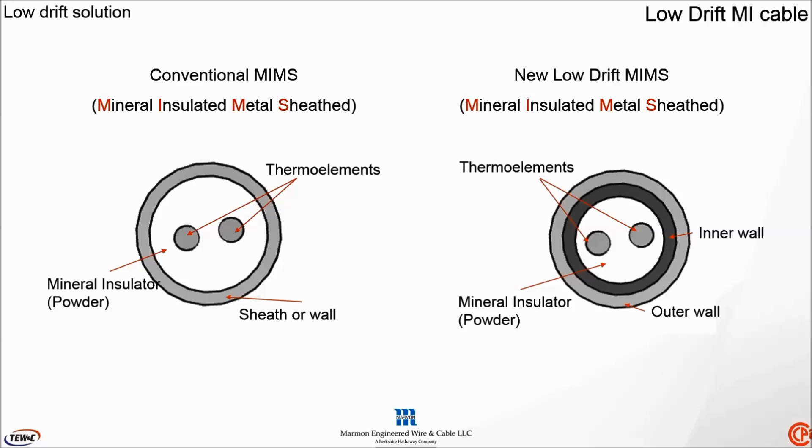What I'd like to do now is show you a set of graphics or animation that shows the concept of what the researchers found: under conventional conditions at high temperature, contamination was caused on the conductors from migration from the outer sheathing itself. This caused a change in the metallurgy, which caused a change in EMF output, which was the source of the drift. With this new low drift design put forward by Cambridge University researchers, this inner wall would stop or reduce the metallurgical contamination of the conductors, and therefore stop or reduce the drift.

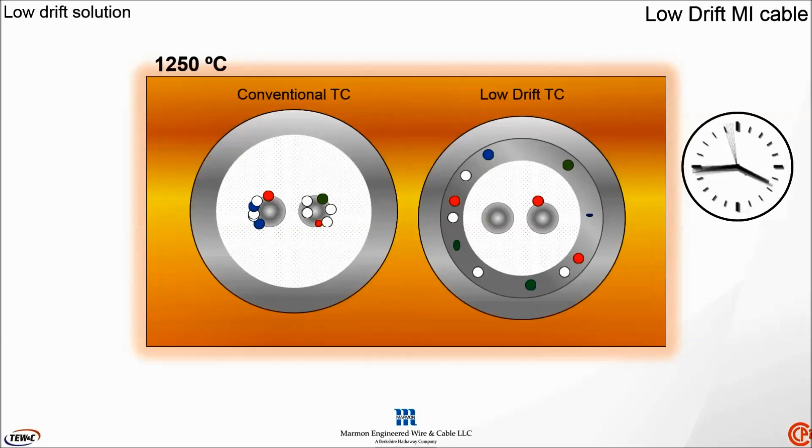So what I'd like to do now is show you a series of test data conducted on this new low drift cable in comparison with the conventional cables that are used in industry today. This first test was conducted at the CCPI Europe laboratories, and it was conducted on 3mm diameter Inconel sheathed Type K conventional MIs against the new low drift dual wall counterpart.

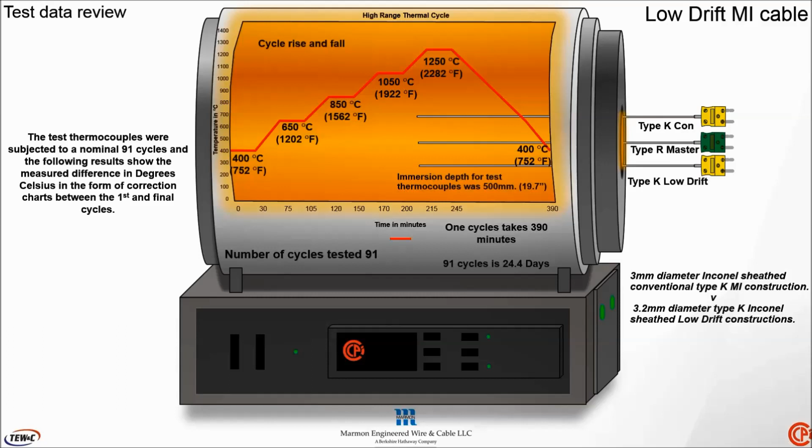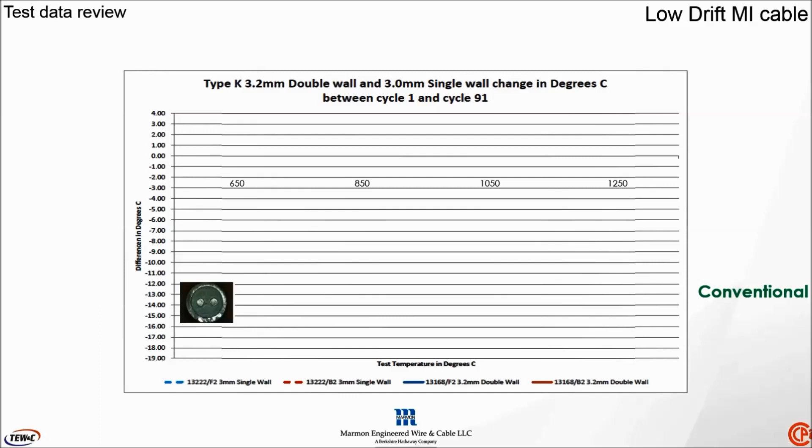The results are going to show us in chart form the change in EMF output in degrees C over those 91 cycles for the respective test thermocouples. Down the y-axis is the change in EMF output over the 91 cycles in degrees C, across the x-axis the temperature points of calibration during the test. So first of all, let's look at the data from the conventional thermocouples. Two units were tested. The first one in blue shows the change over the 91 cycles was between 12 and 11 degrees C. The second one in red was slightly larger, between 15 and 17 degrees C over the 91 cycles.

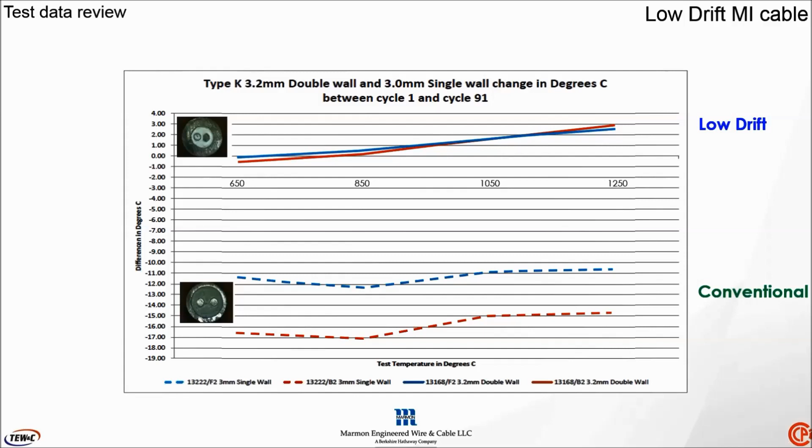Now in comparison, under the exact same conditions, let's have a look at the performance of the new low drift design. Again, two thermocouples were tested. Both thermocouples over the complete temperature range of testing over the 91 cycles showed less than 3 degrees C movement. As predicted by the researchers at Cambridge, somewhere between a 73 and an 83% reduction in drift was observed when the new low drift thermocouple designs were compared against the conventional designs being used in industry today.

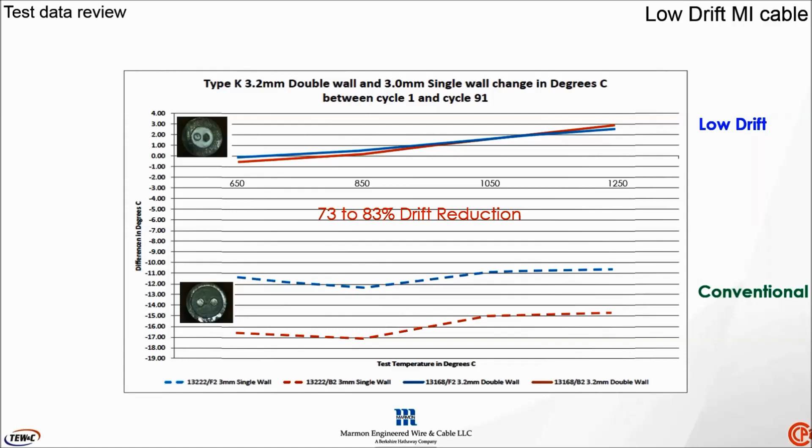This next sequence of testing was conducted at an extremely high temperature of 1320 degrees C, above 2400 Fahrenheit, a temperature we would not normally recommend Type K or Type N thermocouples to be used at. The test was conducted for some 52 hours, or 2 days of operation, and the thermocouples tested were the same as the previous set, i.e. 3mm diameter Inconel sheathed conventional against their 1/8 diameter dual wall low drift counterpart.

The results, again in chart form, show us the changes in correction value in degrees C at the test temperature of 1320 for the respective test thermocouples. In this instance, the chart shows the change in correction in degrees C down your y-axis, and the time in hours across your x-axis.

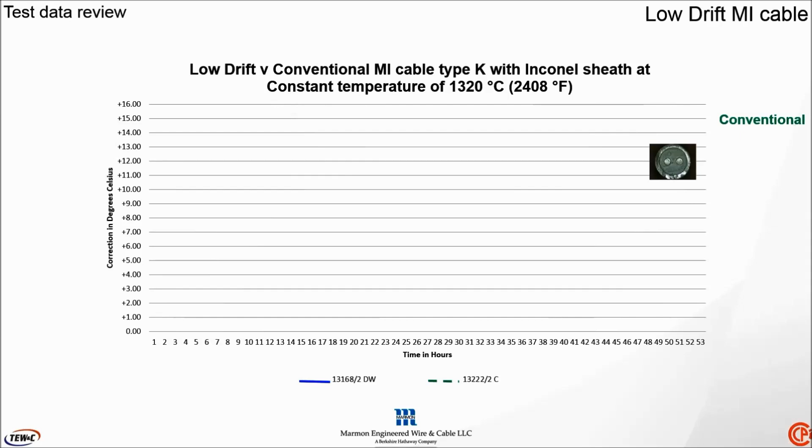So first of all, let's look at the performance of the conventional thermocouple. As we would have expected, a continuous drift was observed, an increase in the correction value, a lowering of the EMF output value, starting at some 3.5 degrees, moving to some nominal 15 degrees, showing a nominal 12 degrees C shift over the 52 hours of operation. Actually quite a good performance for a 3mm diameter Type K thermocouple.

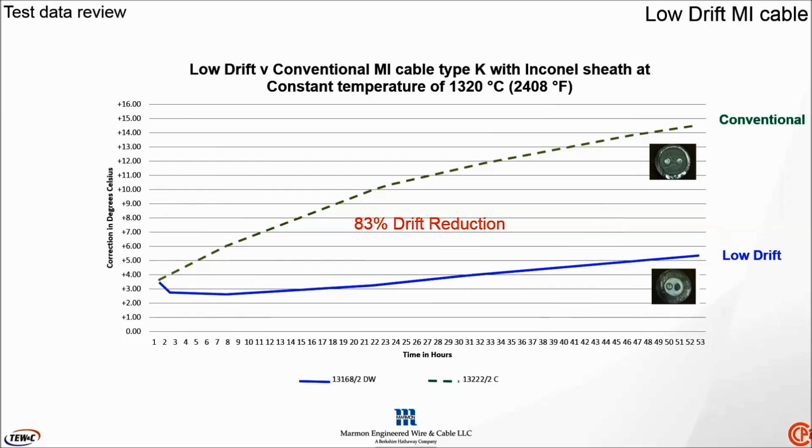Now let's look at the performance of the new low drift design under the same conditions. Well, you can observe a significant difference. Again, starting off at some 3.5 degrees, but finishing at less than 5.5 degrees C correction value, less than 2 degrees C nominal movement, or, as predicted by the team of researchers at Cambridge, an 83% reduction in drift characteristics was observed.

Really, from this data, from significantly large quantities of data from tests carried out at Cambridge and CCPI, the researchers at Cambridge were able to establish and predict that the drift levels of this new design were reduced between 80 and 90% when compared to conventional designs.